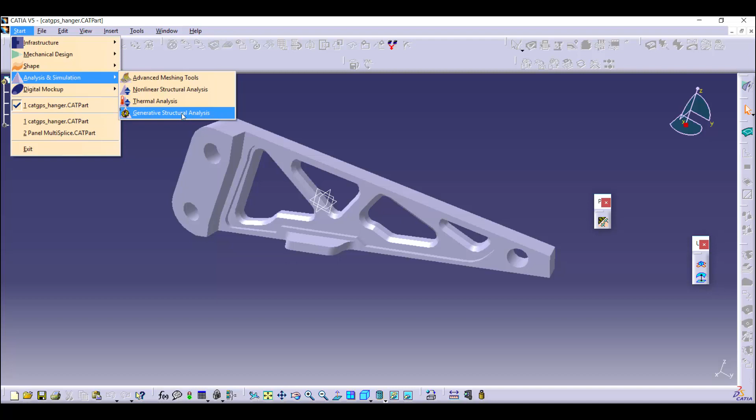Once this license is procured and enrolled, the user can go to the Start menu, Analysis and Simulations, and this GPS would get activated. Before we actually go to this workbench, the one thing I would like to do is assign some material to this hanger on which we are going to perform this simulation.

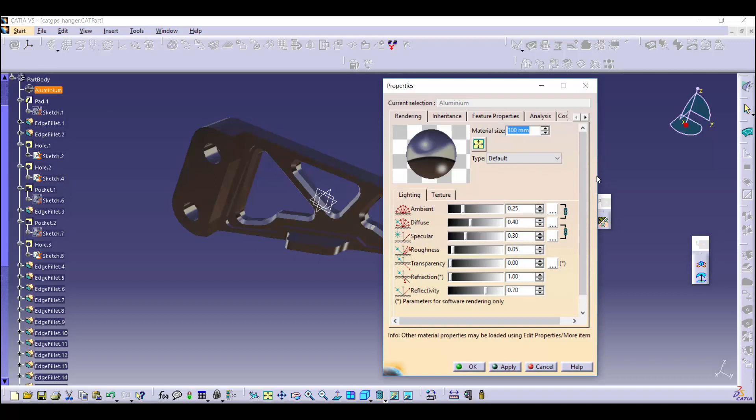Let's pick up an aluminum, apply material, okay. It's pretty much here. If I double click on this, there's a lot of information for this material, but from a simulation perspective, we are only interested in this analysis tab. For a basic linear stress level analysis, all we need is Young's modulus and Poisson's ratio, which is defined by default in the material library. For some other types of simulations, we may require quantities like density for dynamics and thermal expansion for thermal simulations, etc.

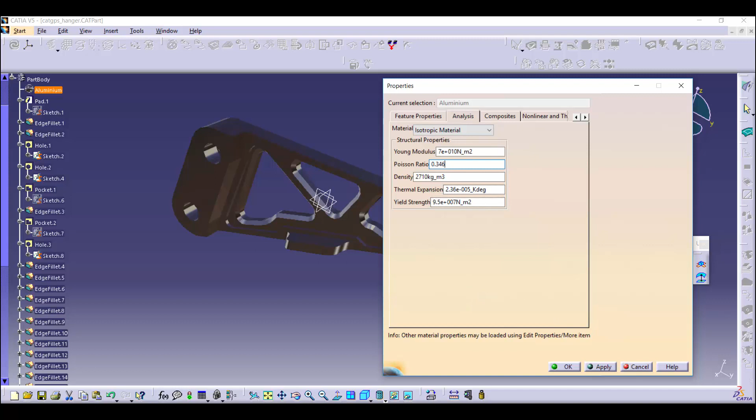Okay, so we are done with material definition. Now let's go back to our analysis workbench.

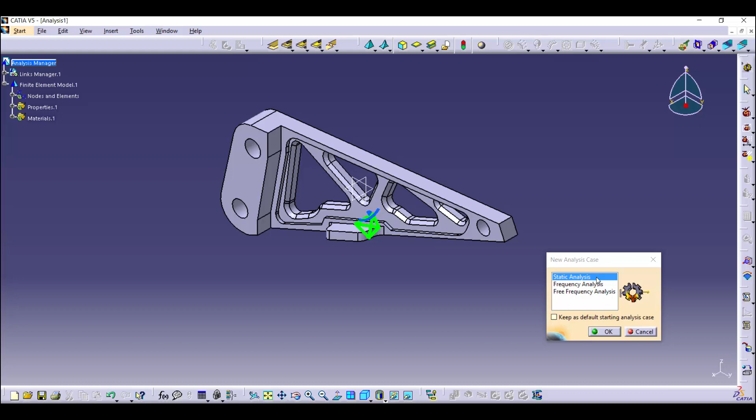Now the first thing the application asks us is what sort of simulation we want to do. Default is static analysis, which is the one we choose in case we want to do a stress simulation. So let's say OK over here.

Now I'll choose the shading type to shading with material. That makes more sense. So we see a green icon over here. If we double click on this, this is primarily the octree-tetrahedron mesh.

We have to discretize this structure into a network of nodes and elements, and we know that designers usually are not familiar with this concept. So the application doesn't ask for lots of advanced input. The very basic requirements that need to be entered are what should be the size of the mesh and what should be the absolute sag. Size primarily defines how finely or coarsely this entire structure is discretized, and sag primarily defines how well any curvatures or complexities in the structure are captured.

The application automatically selects some default numbers based on the size of the structure, but the user always has a choice to change it, make it more coarse or more fine. I'm making it a bit more fine in this case.

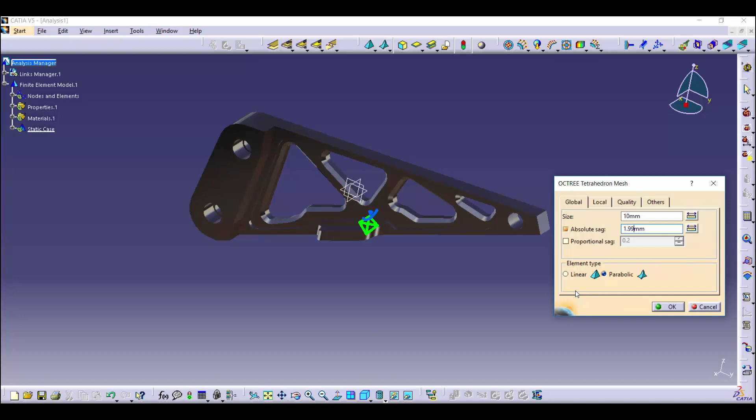And then choose the element type. Linear means more faster simulation time but somewhat less accuracy. Parabolic means computationally more expensive but more accurate as well. I go with the parabolic option over here. So that's about discretization. Nothing is done right now. All this discretization would take place when we eventually perform the simulation.

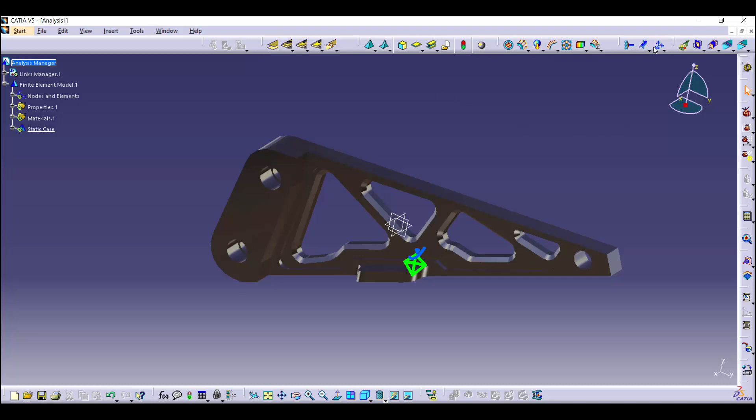Now we see a lot of stuff over here at the top. These are different toolbars used to carry out different activities. Here, let's say we have a restraint toolbar, and I'm going to use the clamp option to primarily fix the structure somewhere. So these two holes are fixed. I select two faces and say OK.

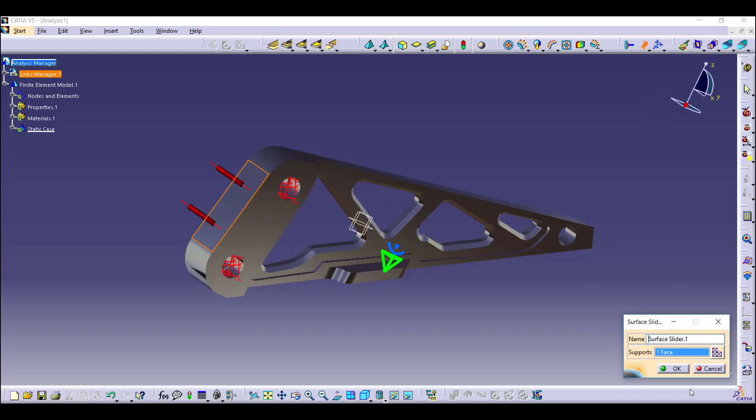And then I also want to put a slider constraint on this face, because this face is connected to some other structure in reality, so I really don't want any perpendicular motion over here. For such a situation, I have a surface slider option which I can use. Select the face and say OK. So that's the restraints definition.

Now I need to put a load somewhere as well. So I'll go with a distributed force load. There are a bunch of others as well. The simplest one is distributed force, and I take this surface as the support, and maybe I want to put a 3000 Newton force in the Z direction. Okay, so that's all I need to do.

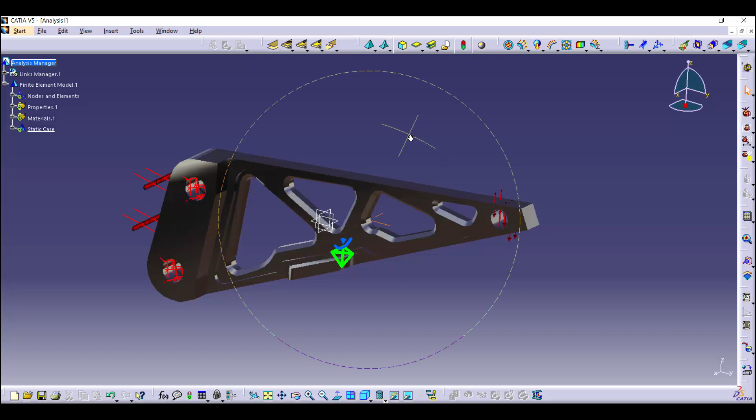Basic definition is complete and everything is stored in the tree. So if I go on expanding this tree, everything is there which can be modified or changed: the mesh definition, the material definition, two restraints, clamp and surface slider, as well as a distributed force. Everything can be modified later on just by double clicking and either changing the numbers or changing the location or both.

We are all set to perform the simulation, but where does the data go in itself? Let's look at that.

So there's an external storage option. If I click on this, it gives me two options: CATAnalysisResults and CATAnalysisComputations. These are the two basic output files created once the simulation is complete, and we may need these later if we want to modify an existing solution. So we can either change the location, keep it in a safe directory, or keep it in temp.

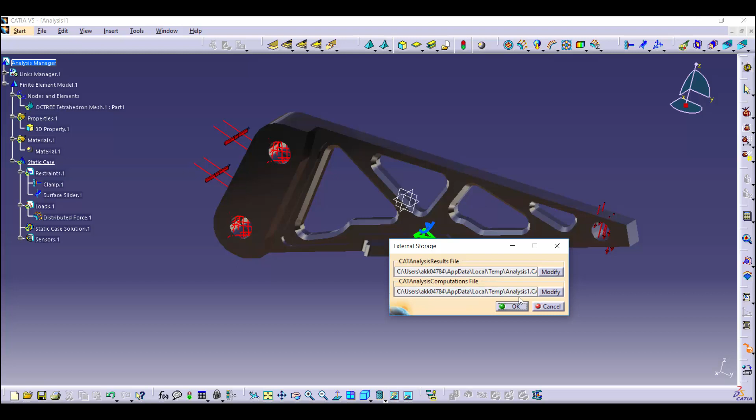Now if I want to compute the simulation, there is a compute icon. Click on this, and there are multiple options: mesh only, case solution, etc. I go with all, which means I am telling the application to discretize the structure, apply the loads, apply the constraints, solve it, and directly give me the results.

So if I click on save, okay. Now a lot of back-end activities would be carried out. At first there would be some resource computation, how much memory is required, how much hard disk space is required. If we are okay with it, we click yes and move further, and the simulation proceeds.

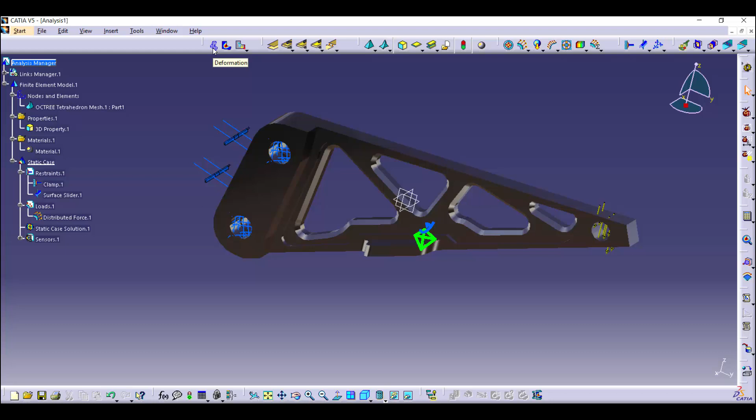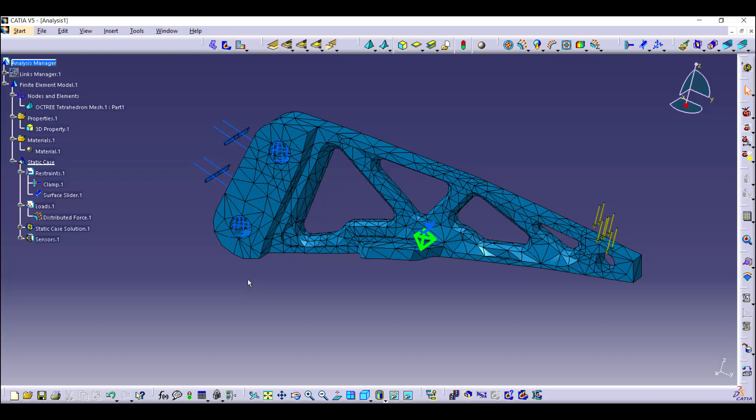It's probably complete now. This is a relatively simple and small model, so we are in a position to visualize the stresses. The first thing we may like to look at is deformation, and if I change the option to shading with edges, I can see the mesh we defined earlier, with an edge length of 10 units. We may like to hide a couple of things we don't want to see. Okay, so this is how the mesh looks like.

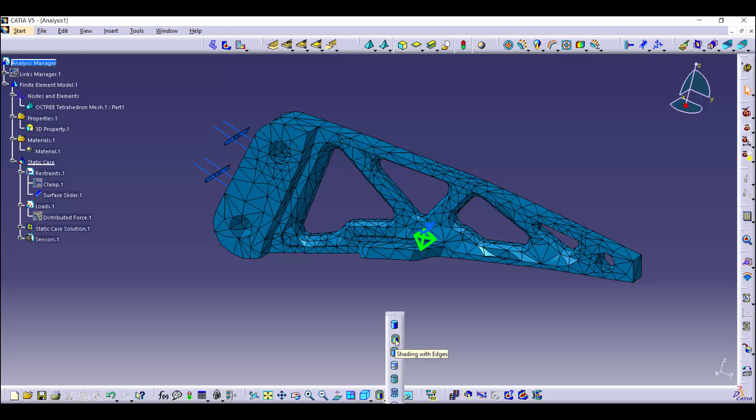I have to go to the shading with edges option to visualize it. I can go back to shading with material.

The other output quantity that we quite often ask for is von Mises stress. So these are the stress values, and there's a legend that shows the value associated with the color. 1.27 E6 is the minimum and 2.56 E8 is the highest, at these two hotspots.

There is something called image extrema, which I can use to create a balloon and display the absolute location and value of the displayed quantity. So if I say OK, it shows me that the von Mises stress maximum value is right at this spot, and that maximum value is displayed here as well.

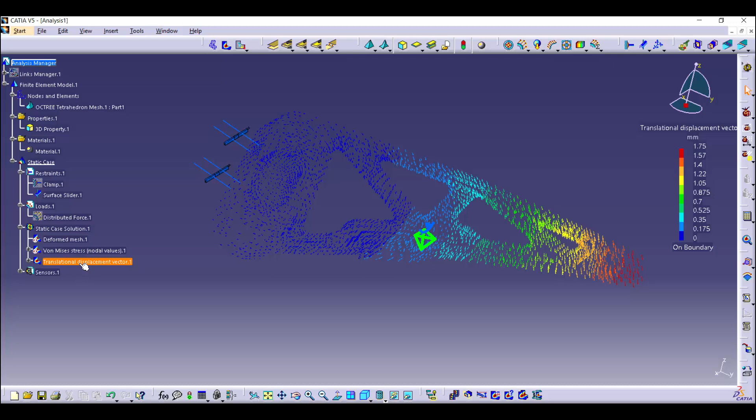I can go again to image extrema and deactivate it. The other output quantity I can look at is displacement, and as I create these images, they are stored in the static case solution. So right now the displacement one is activated. I say average ISO, and I can look at a similar plot of displacement, moving back and forth, activating and deactivating one of these.

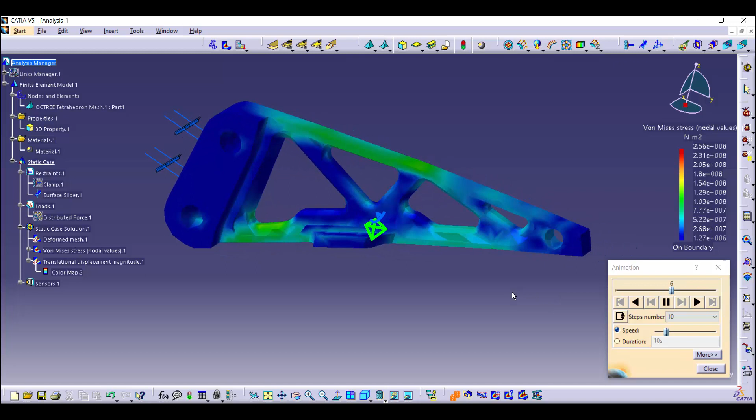It's also possible to have animation, in which the structure gradually deforms and the displayed contour, whether stress or displacement, is gradually established. That's one option. If we want to look at both quantities in the same plot, we have to activate both.

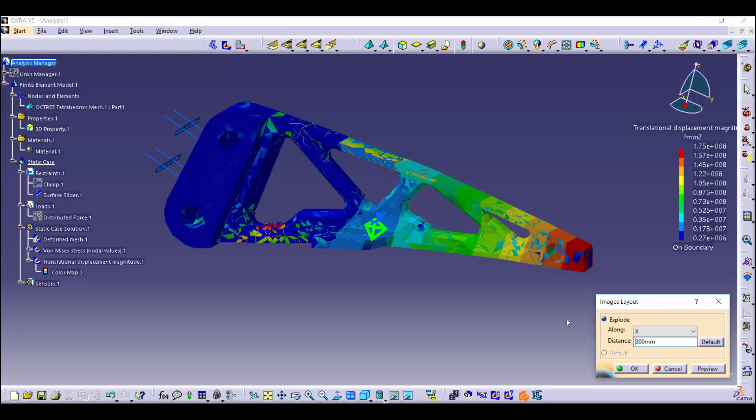There is some option called image layout. Maybe let's say 200. Okay. So this way it's possible to display more than one output quantity at the same time, and we can take a snapshot of this and do a number of things with it.

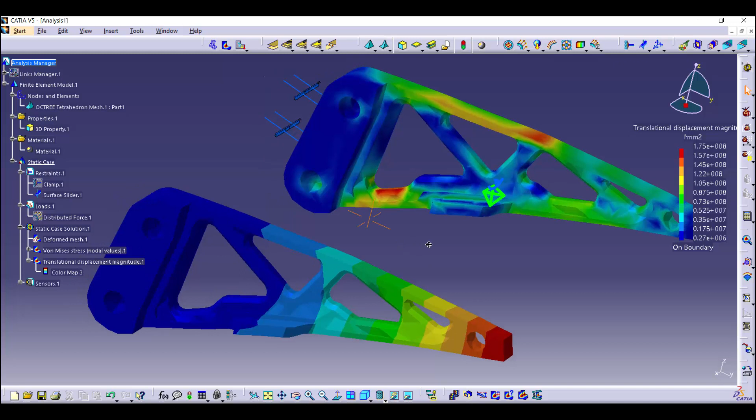So I deactivate again one of those. Let's keep one at a time.

There's also an option to generate a report, which is an HTML file containing all the information about the inputs and all the images generated so far. So if I click on generate report, add created images, and give it some title, let's say 'hanger', and okay.

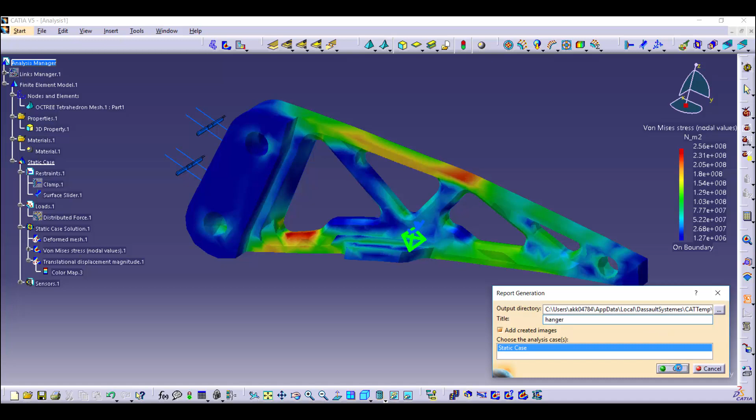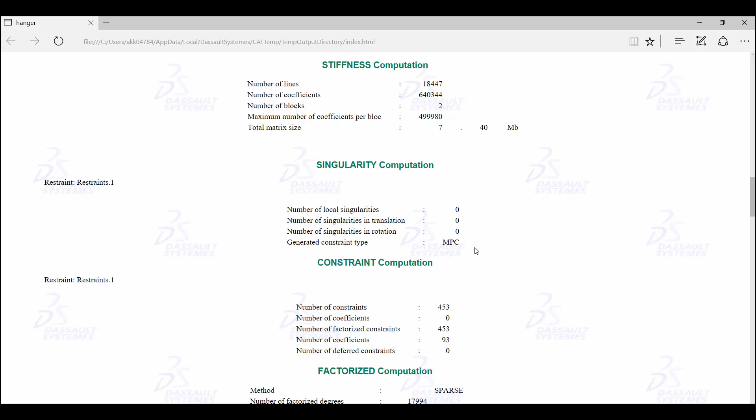Okay, so this is the report. It mentions the number of nodes, elements, element type selected, the criteria, the material definition with all the values, the images for boundary condition, constraint, singularity computations, and a couple of images. So this is the deformed image, and this is the stress image, and so on.

So that's pretty much about this particular session. In future, I'll be demonstrating some advanced things with the same tool, such as how we perform assembly level simulations and how we gradually incorporate things like material and non-linear boundary conditions for such types of simulations. Thank you very much.